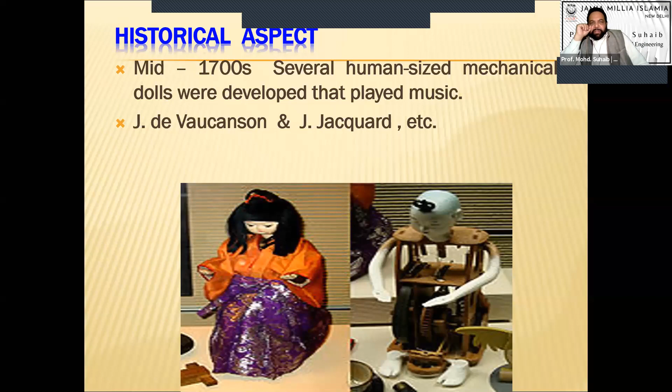Mechanical dolls were developed somewhere around the mid 1700s by scientists and engineers of that time. The intention was not originally for robots, but it automatically fell in line with robotics, under the category of what we call industry 2.0. These dolls were totally mechanical, and several other mechanical machines were developed at that time working purely on mechanical systems. Especially, the mechanical doll was developed for making different drawings.

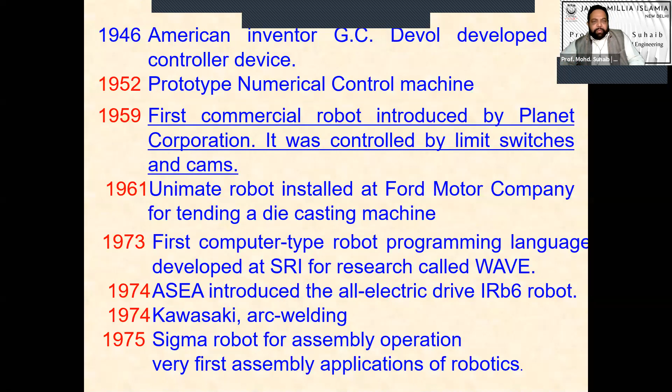In this race, somewhere in 1959, the first commercial robot was introduced by Planet Corporation. Thereafter, other players came into the market one by one - in 1961, 1973 Kawasaki came, then Sigma robots, Puma robots, and in the 80s IBM came into the market, followed by Honda and other players. But one major drawback with robotics is that these players who came into the robot market keep their monopoly, and this monopoly is such that even today they hold full-fledged monopoly.

There are very few players developing robots for a particular type of job, and for that robot they hold their own monopoly - no one else can enter their technology. If something goes wrong, you have to depend on them. It's not like a computer, where if something goes wrong you need not depend on one source - you can go to any person and they'll do the needful. But in robotics, and to some extent in CNC machines too, this monopoly is held such that whatever technology they have, they don't give the codes to others, and those players stand alone with their product in the market.

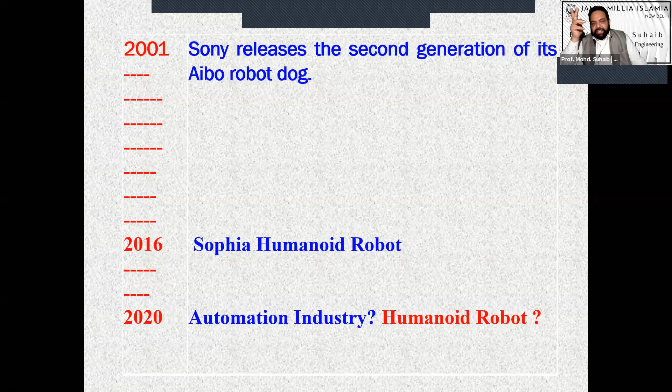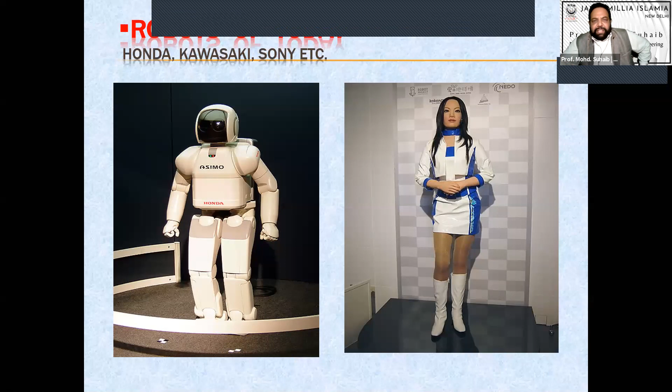These robots are available already - the Asimo robot was there in the Ashoka Hotel, you'll be knowing this. Sara is a theater dancer of Korea, used in a theater as a dancer. And in the race of robotics, the latest technology or ultimate thing that robotic engineers have developed is Sophia.

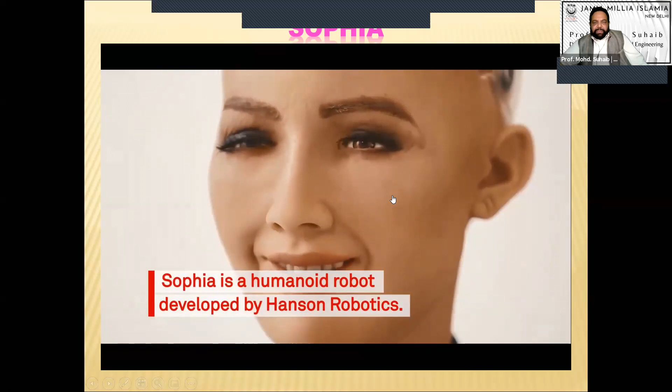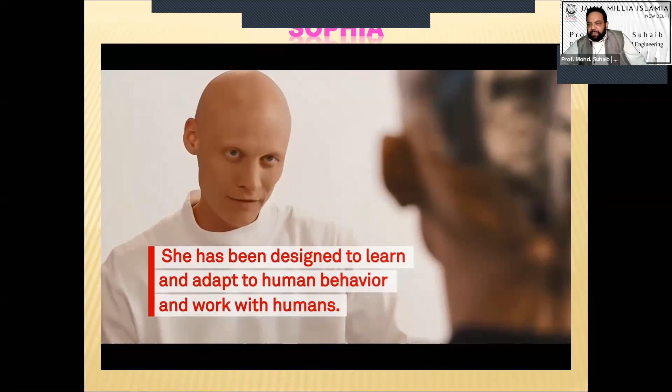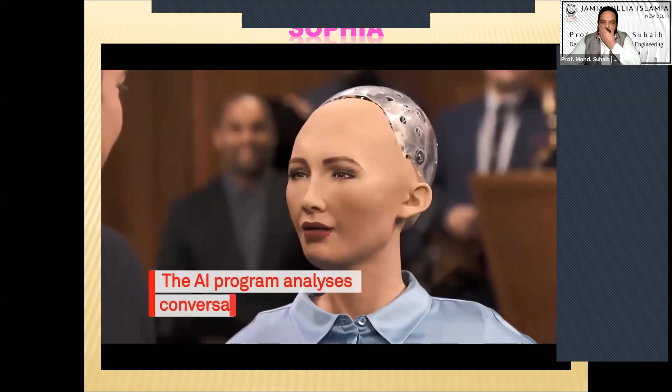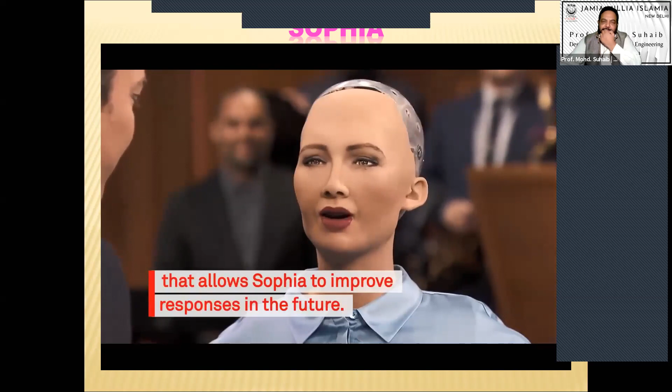In our country too, different players have developed different types of robots. Regarding Sophia, as far as Sophia is concerned, this is the ultimate technology developed in the field of robotics. You'll be knowing that Sophia has also visited India - she came to IIT Bombay and IIM Ahmedabad. You can see all these videos available on the net.

Now coming to something more specific to our area, engineers. I assume most of you here are engineers. Engineers are people who design, construct, and maintain structures, materials, and systems while considering the limitations imposed by practicality, regulations, safety, and cost. One important consideration whenever you are developing or designing any system is cost - it's one of the very important criteria for engineers. Any product, if it is not economically justifiable, there is no use - you can't launch it in the market.

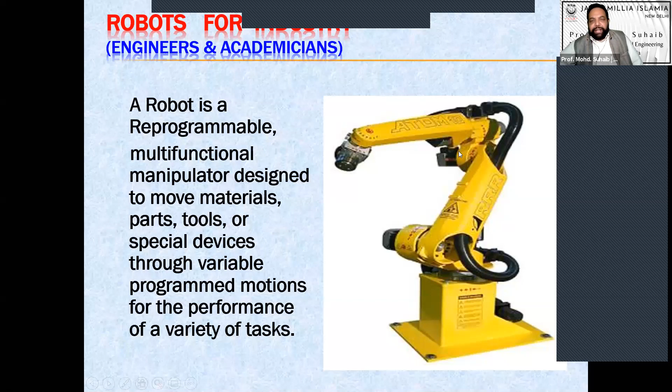So similarly, in case of the robot also, why not have only the hand? So engineers talk about the robotic hand only, and we call this an industrial robot. So an industrial robot is a robot manipulator or robotic hand. Yes, of course, in this robot, one thing will be a mechanical arm, the other will be a controller, which is the brain. Brain is required. Sensors will be there. Some communication system will be there. And at the end, the grippers will be there, and power supply. These are the elements of the industrial robot.

Rather than having a full-fledged humanoid robot, this system, which is the cost-effective system, is generally used in the industries, and we call them industrial robots.

Most of the time, it happens that people from sociology or social sciences backgrounds come into the robotics lab and ask us where the robot is, and they stand adjacent to the robot, because they have a concept that a robot will have a head, two legs, and two hands. But industrial robots are robotic manipulators. They are the robotic hand having these elements. And this is one of the ways we use these types of robots in industries, especially in the manufacturing sector.

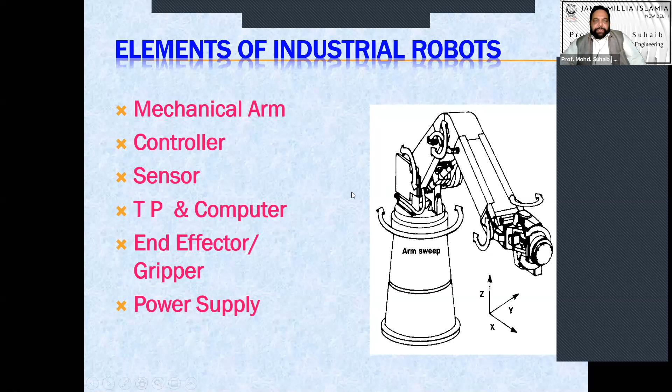So when we talk about industrial robots, there are two major parts: the body arm and the wrist assembly. In your hand also, you see the two major things. One is the body arm and the other is the wrist assembly. Similarly, in the industrial robot, they have their own importance. The body arm has its own importance and the wrist assembly has its own importance.

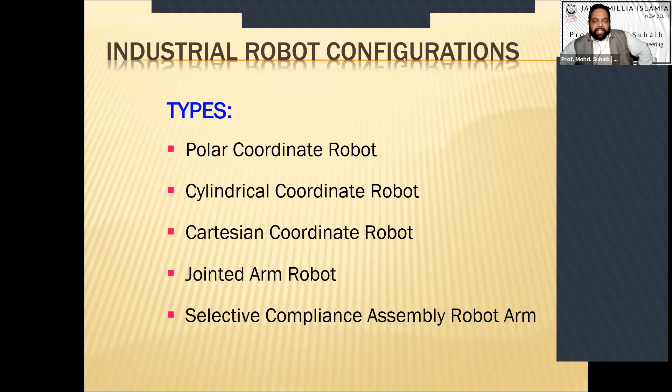The common body arm configurations, you must be knowing, you would have seen in the books: polar coordinate configuration, cylindrical coordinate configuration, Cartesian coordinate, jointed arm, and SCARA configurations. These are the standard robot configurations for the body arm.

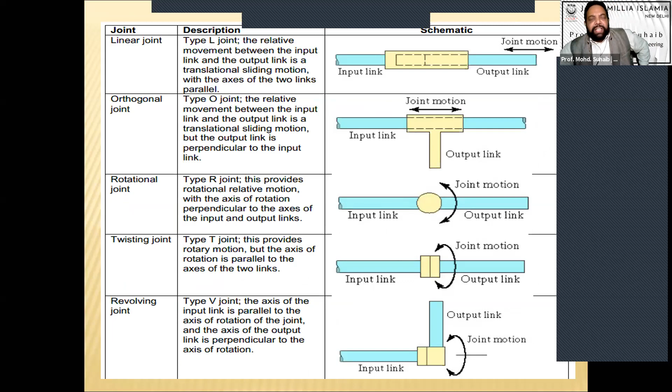And we achieve these configurations with special joints. These joints play a very important role in achieving these configurations. We don't have the time to discuss these joints, but they are a very important thing in the area of robotics for designing configurations. On the basis of the joints, we denote the different robots. Rotation, for example, polar coordinate, generally we say TRL.

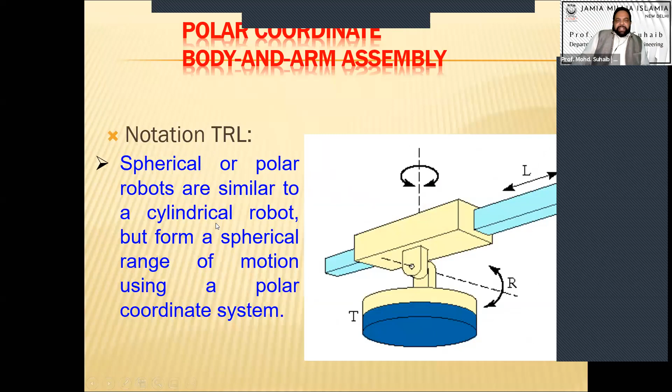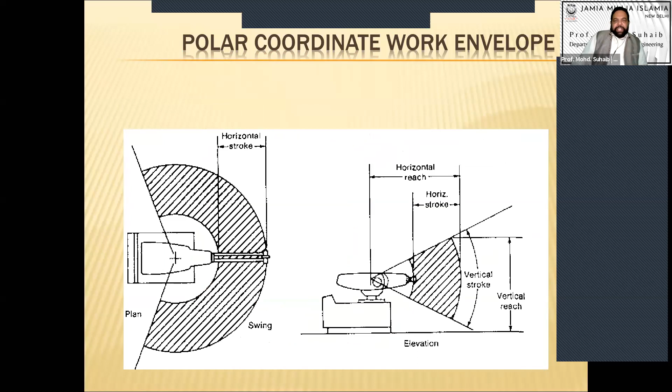And the work envelope, the zone in which the robot can work, is known as the work envelope. For the polar coordinate, we get a sphere. And the two important things, the reach and stroke, are related to what extent these arms can work in a horizontal direction or in a vertical direction. Accordingly, the horizontal reach and vertical reach are there.

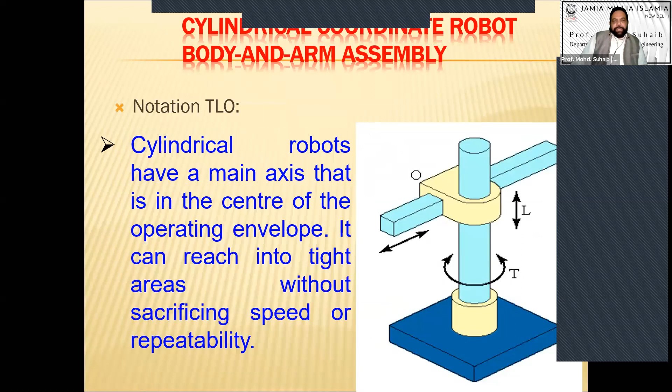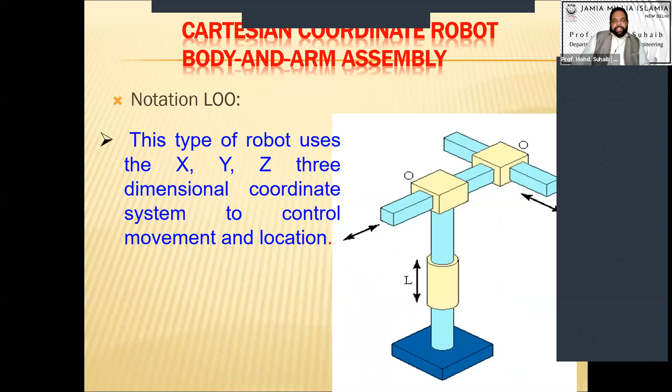Similarly, for the cylindrical coordinate robots, we get a cylinder as the work envelope. Cartesian coordinate robots, of course, all the joints have the Cartesian motion, where you will be getting a cuboid as a work envelope.

The most common and versatile type of robot is the jointed arm, also known as the articulated arm, where all the joints are rotary joints. Of course, the base is twisting. So here the work envelope is the semi-sphere.

Then the last is the special purpose robot known as the selective compliance assembly robot, which is the combination of, you can say, the cylindrical arm and articulated arm, and even today it is used in different assembly lines.

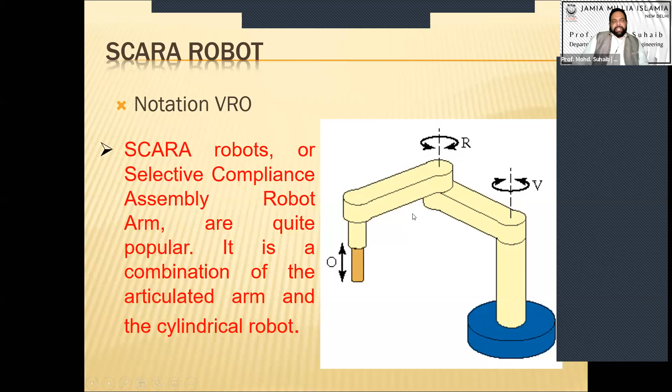Now coming to the wrist configuration. At the wrist, as you see your wrist, one of the very first features is the gyroscopic motion: roll, pitch, yaw. This motion is pitching, this motion is yaw, and this is roll. So at the wrist end, we have 3 joints.

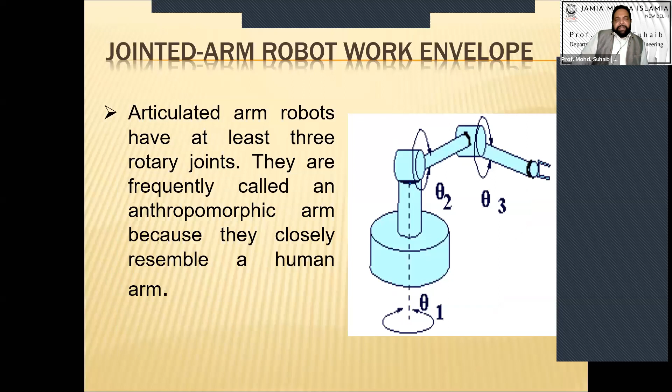So one thing to be kept in mind is that generally we have 3 degrees of freedom in the body arm, and 3 degrees of freedom at the wrist end, in the wrist configuration. We are not talking about the fingers. So generally there are 6 degrees of freedom for a robot: 3 for the wrist and 3 for the body arm. However, further degrees of freedom depend on which type of end effector you are going to use.

At the end point, you can mount some tool, or you can mount some gripper. In case of the tool, most of the time there is no degree of freedom, so the total degrees of freedom of the robot will be 6. And if it is a gripper, then the degrees of freedom will vary.

And here you see that again cost is the issue. So in industries, depending upon the application, we decide whether we are going to use the tool or the gripper. If we can work with the tool, we are not going for the gripper. But there are situations where a tool will not work, and we will have to go for grippers.

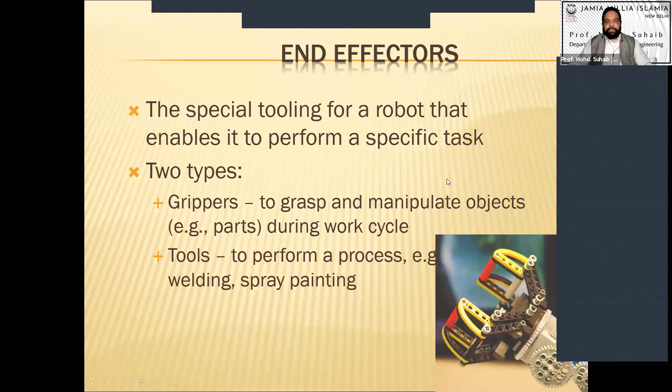Now coming to the specifications of the robot, as per the definition we gave of robots: a robot is a reprogrammable multifunction manipulator designed to move material, parts, tools, or special devices through variable programmed motions for the performance of a variety of tasks.

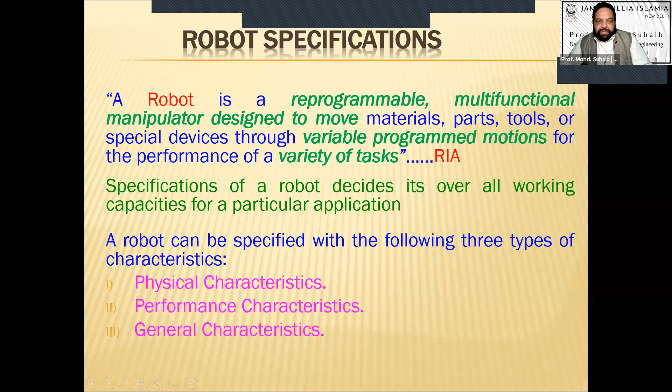So on the basis of this definition, there are three types of specifications required for robots: the physical characteristics, the performance characteristics, and the general characteristics. These characteristics are important whenever you are going to purchase or design a robot for any particular type of application.

If you talk about the physical characteristics: the robot configuration we discussed, the number of axes, that is the degrees of freedom of the robot, type of axis movement, the floor space required, then the physical details, weight and physical dimensions, type of power service requirement, which type of programming there is, control system, sensors, memory. All these come under the heading of physical characteristics.

Then if you talk about the performance characteristics: accuracy, repeatability, resolution, velocity range, operating cycle time, load carrying capacity, life expectancy, reliability, maintainability, mean time between failures, mean time to repair, availability. All these are the specifications related to the performance of any particular robot.

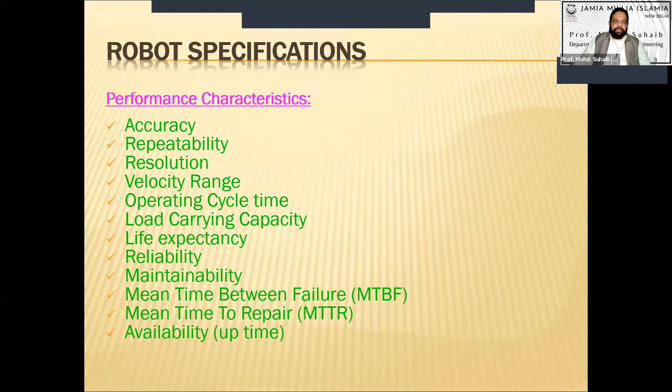Then these are some general and common characteristics: movement capability, input-output capabilities, special features and end effector capabilities, work volume or envelope reach. So it's important that whenever you are going to use, design, develop, or propose a robot, you must have an idea of the specifications, exactly what is required, and which particular specification you need up to which level. Accordingly, the cost of the robot will vary.

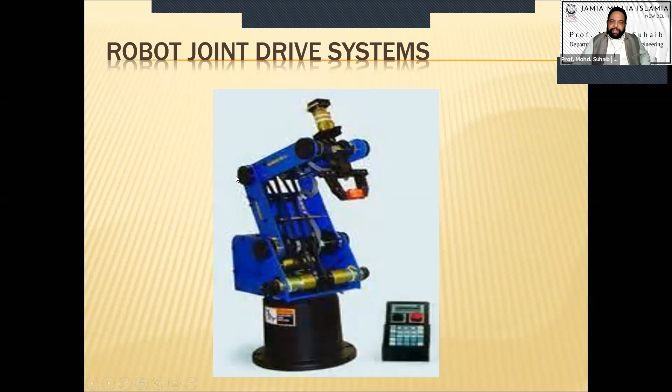You see a standard educational robot, ER4U. Ultimately, when we have been discussing the industrial robot, it is just some structure where one end is fixed and the other end is free. The links are jointed or connected with each other by some type of mechanism. And if you remember, this is nothing but the open kinematic chain we studied in theory of machines.

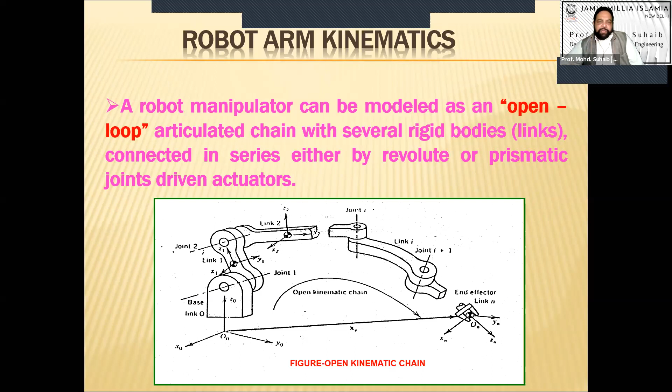In theory of machines or kinematics of machines, if you remember, there are kinematic chains, open kinematic chains. So an industrial manipulator, an industrial arm, is nothing but an open kinematic chain where one end is fixed and the other end is free. So from the kinematic point of view, it is very important to know the inverse and forward kinematics of the robot. For that, we do different types of analysis. We will not go into full detail on forward and inverse kinematics; a lot of mathematical treatment is there.

However, we treat it as an open kinematic chain. One end is fixed, the other end is free, and we put different coordinate frames on the different links, and the coordinates at the last link we transform with reference to the base coordinate. So we can get the position and orientation of the last link, which is our primary interest. In the case of the industrial robot or robotic manipulator, we always try to analyze the position and orientation of the last link, because in industry this is ultimately the end effector or gripper which is going to pick an object, place it somewhere, or take it from somewhere.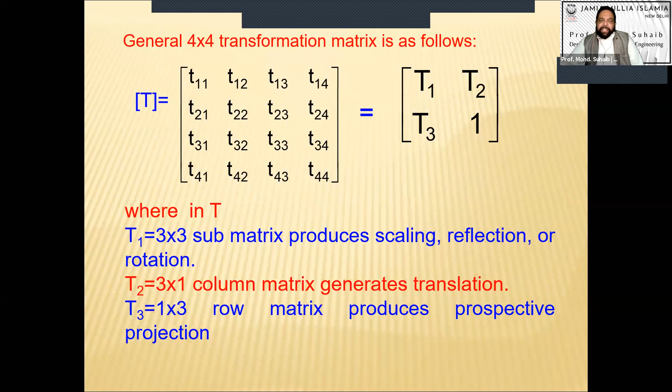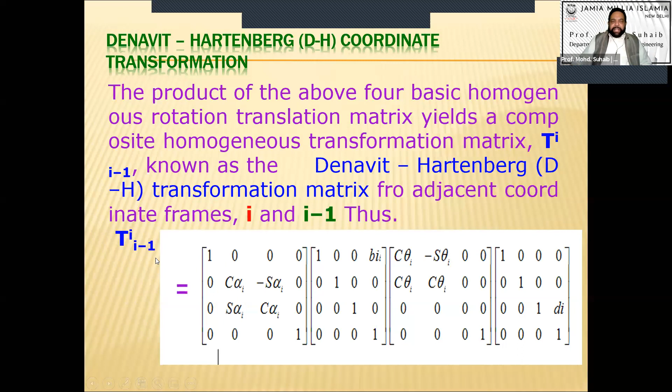So position and orientation of the last link is our primary interest. In the case of kinematics, the standard homogeneous transformation is used for this job, and you must be knowing this standard transformation matrix. With the help of this matrix, Denavit-Hartenberg is a standard procedure given by mathematicians, and with this we develop a matrix T from i minus 1 to i, which is used for transforming the coordinates between link i minus 1 and i.

For example, if i is equal to 1, it will be from 0 to 1, or similarly 1 to 2, 2 to 3, 3 to 4, up to n number of links, whatever links are available. And this is the standard matrix which is used for forward and inverse kinematics.

These are the link parameters: ai, link length; alpha, the link twist; di, the link offset; and theta, the joint angle. So we analyze these 4 parameters and apply this DH matrix, and we can go for the forward or inverse kinematics.

As standard practice, for given joint angles and link parameters, determination of the position and orientation is known as the forward kinematics. And opposite to this, for a given position and orientation and link parameters, determination of the joint angles is known as the inverse kinematics.

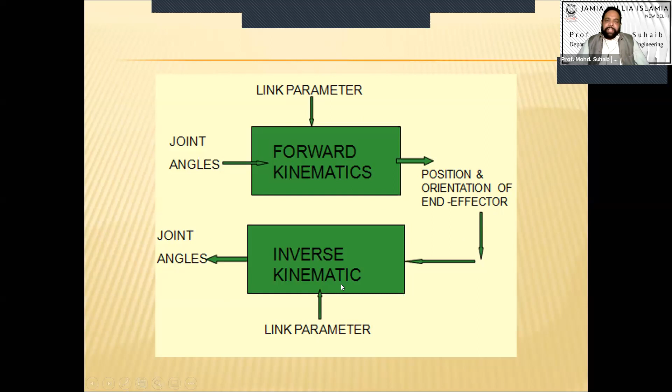So inverse kinematics is more important compared to forward kinematics. Whenever we use robots in industry, we have to program them, and for programming we need the joint angles, which we determine with inverse kinematics. So as a concept, where is my hand? The answer is given by direct kinematics. And how to send the hand there? That answer is given by inverse kinematics.

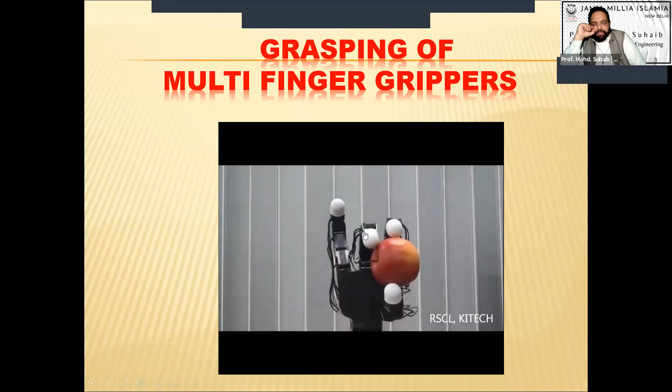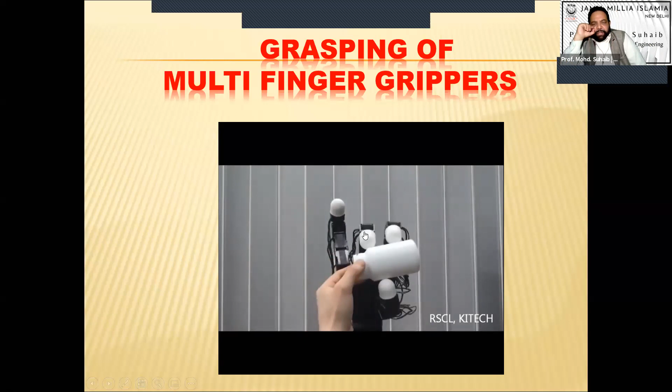So now coming to something more specific, focusing on grippers. See here, in a multi-finger gripper, the grasping process. Sometimes the question arises: how many fingers are required for holding the object so that it is in equilibrium, in dynamic equilibrium?

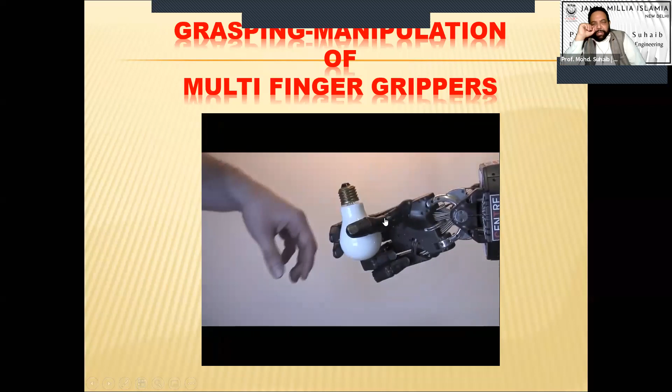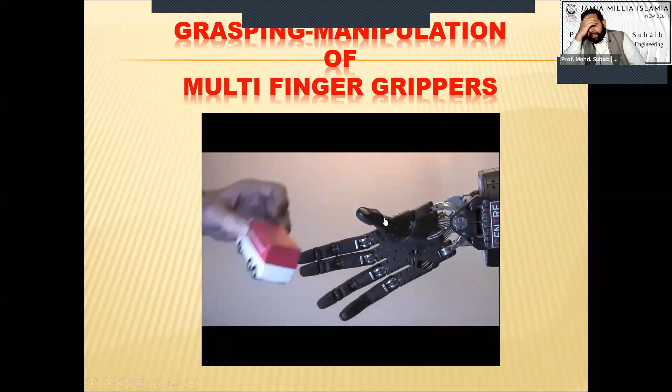Most of the time, as far as tools are concerned, tools are a single finger with 0 degrees of freedom. With 2 fingers, as you would have seen in the last video, parallel jaw 2-finger robotic grippers are very common. But when the object shape is not regular, we have to depend on multi-finger grippers.

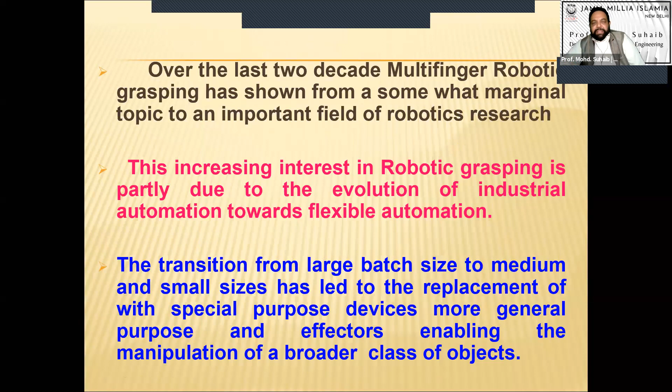Over the last 2-3 decades, multi-finger grasping has grown from a marginal topic to an important field of robotic research. This increasing interest in robotic grasping is partly due to the evolution of industrial automation towards flexible automation. The end effector becomes more flexible, control becomes more complex, and better understanding of grasping turns out to be one of the challenging issues: how to hold the object in a proper way.

Body and arm are okay, wrist is okay, tools are okay, grippers are okay, but we need a gripper which can hold objects with proper holding characteristics: dexterity, equilibrium, stability. Developing this type of finger is one of the challenging issues for researchers. If you refer to the literature, you will find people have been working on it for years, and even today proper grippers have not been developed. That's why the degrees of freedom are 16 and 17.

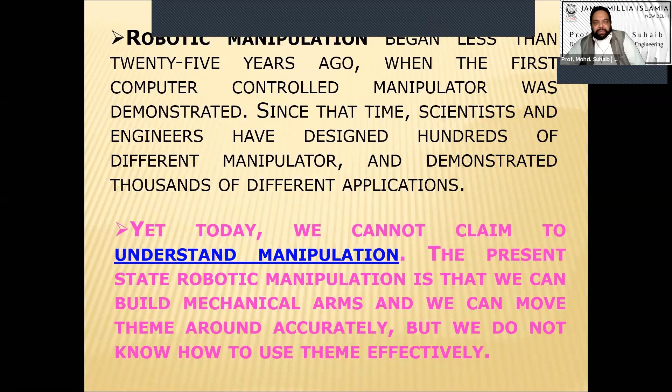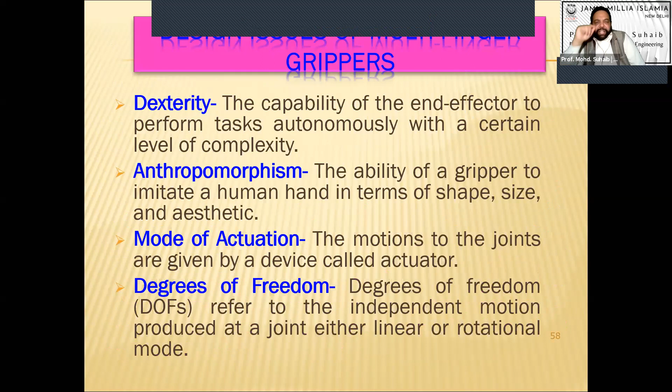The design issues which are related to the multi-finger grippers are dexterity, anthropomorphism, mode of actuation, and degree of freedom. These are some common issues which we have to achieve in a versatile gripper. A lot of people have been working in this area, and if you refer to the literature, you will find several hands have been developed. But issues are there with reference to these parameters: dexterity, anthropomorphism, mode of actuation, degree of freedom.

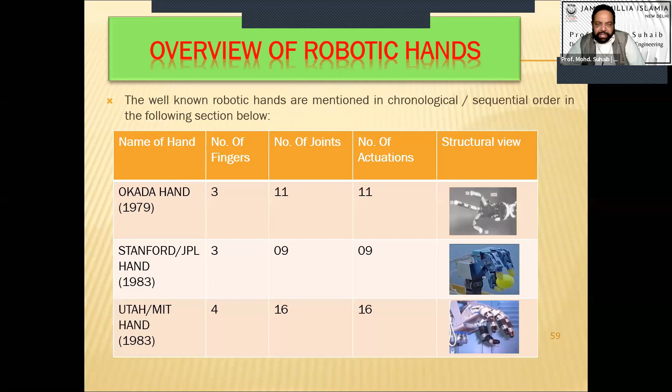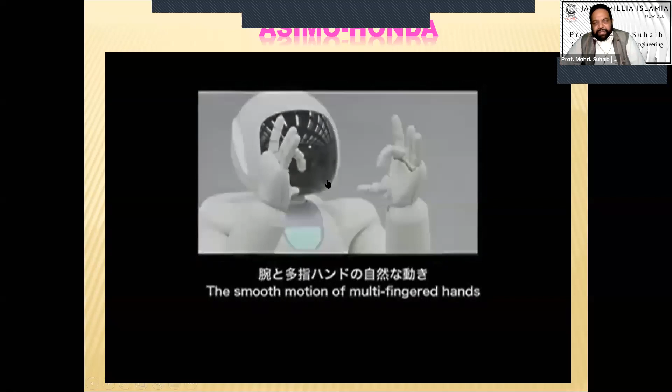Either you take the Okada hand or the Stanford or MIT hand, in all these hands you can see the number of actuations and degrees of freedom are varying. And they are not able to reach up to the human hand. Whatever hands have been developed, they are being used in robots within their existing capabilities. This hand is looking like the human hand, of course, but it doesn't have all the capabilities of the human hand. The degrees of freedom are not there.

So, even in this area, developing a hand which can replace the human hand is one of the challenging issues. And I am also working in this area. I will be showing some of my work in the next slides. Before going to that, I would like to discuss

I think the slide is not working.

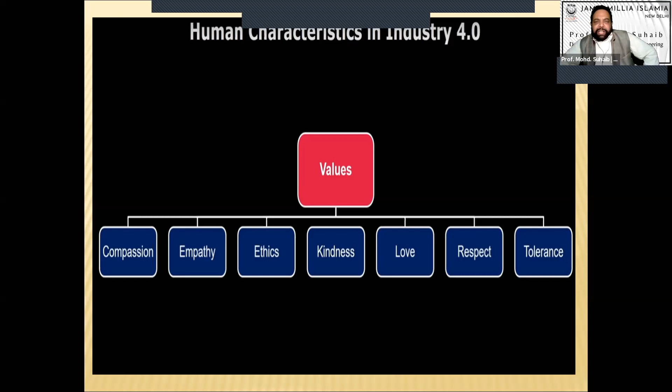If you talk about humans, they used to do these things. But what about the machines which are coming, whether they will give these values or not? It is one very big challenge, because scientists or engineers have to think about it, yet they are busy with the technology. This interaction of Humanity 4.0 with Industry 4.0 raises common issues: job creation versus job destruction, the definition of education per person, the definition of the human being. Either these have to be changed or we have to stop it somewhere.

So this is one area where things are going to diverge very soon. I will not continue further in this area because this is not the topic here. However, this is a very interesting area and it needs a lot of discussion.

As I told you, I have done some work on multi-finger hands, and we developed this hand, which we named the Jamia hand. This hand is designed in the Robotics and Automation Laboratory, Department of Mechanical Engineering, Jamia Millia Islamia. It consists of 3 fingers and a thumb, designed to imitate the anatomy of the human hand. 3 fingers and 1 thumb, so a total of 4 fingers, not 5. As I told you, the number of fingers in the human hand is 5.

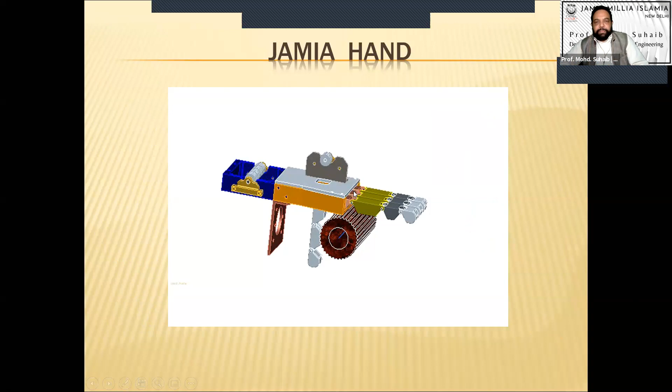Each finger and the thumb has one actuator for joint movement, as in the finger hand. You can see here, in between the joints are there, and here in the hand we have the motion. At least on one joint you need one actuator, and for that you need the control. This gripper which we propose here in our laboratory is a tendon-driven one, so one tendon passes from the very first joint through all of them, and ultimately it goes back. You see here, this type of actuation is there.

This mechanical hand used as an end effector robotic arm is primarily composed of 4 components, namely joints and links, actuation system, transmission system, and sensors. As far as degrees of freedom are concerned, on one finger we have 3 degrees of freedom, however in the thumb we have 2 degrees of freedom. So total degrees of freedom will be 11 for this hand.

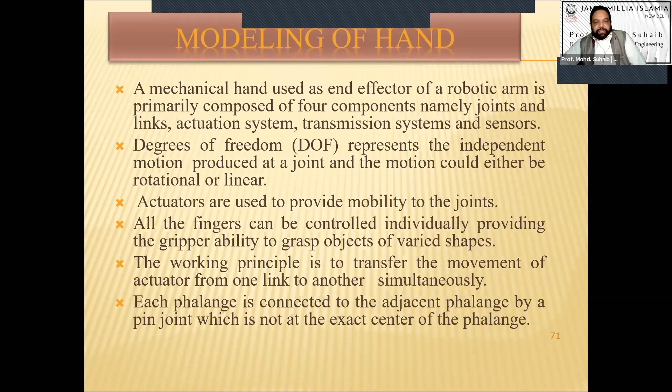You can see here the links and the phalanges, and how the tendon is passing. On these joints, where phalange 1 is connected with phalange 2, and phalange 2 is connected with phalange 3, we have a pulley system, and at the same time torsional springs are also there. So inward motion we will be achieving with the help of applying force, and outward motion will be automatic with the help of the springs.

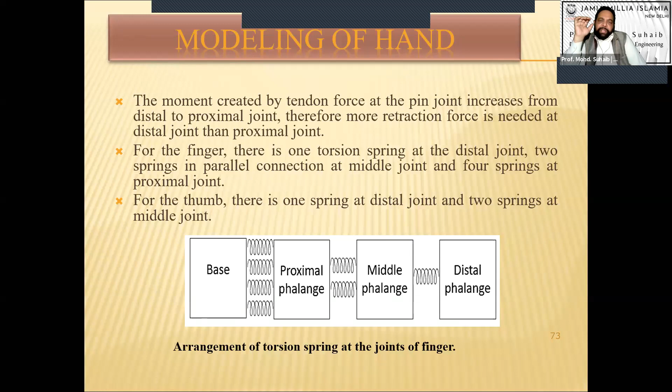These springs, at the distal-most joint we have 1 spring, then at the middle and proximal phalange we have 2 springs, and at the proximal phalange and base we have 4 springs. These torsional springs work for reverting the hand to its original position, however for inward motion we will be using the tendon force. This is the isometric view where you can visualize holding different objects.

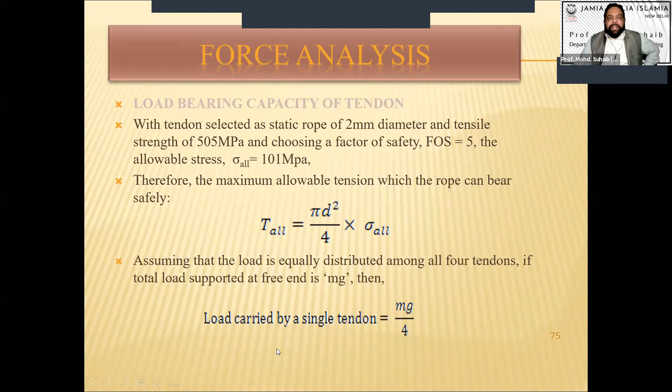Regarding its force, and some studies, we have a shortage of time. Force analysis using standard design equations, you can go for its force analysis.

We have done this force analysis using the standard T1 upon T2 equals e to the mu theta, because a belt pulley system will be considered here, starting from 1 to 2, 2 to 3, 3 to 4, 4 to 5, 5 to 6, 6 to 7, and 7 to 8 last. In this way you can calculate the tensions, and this is further verified both numerically and experimentally.

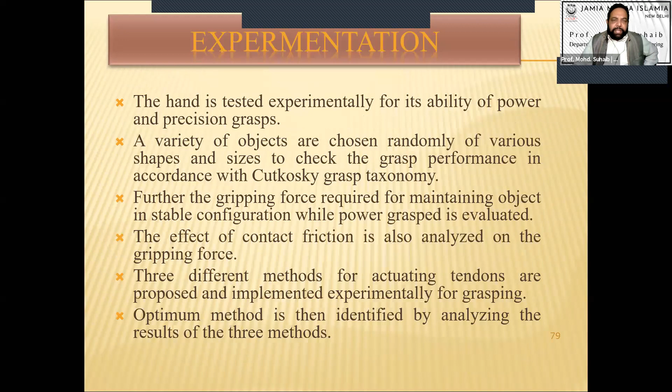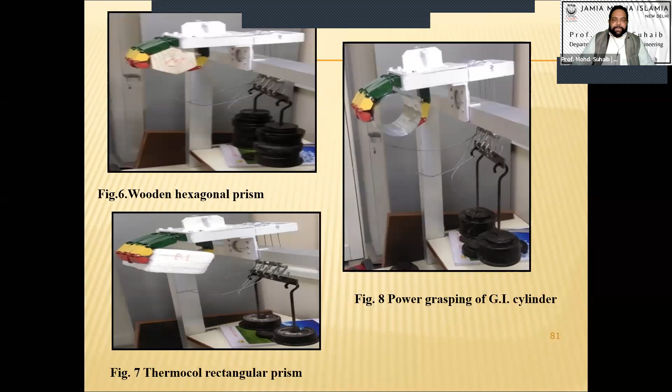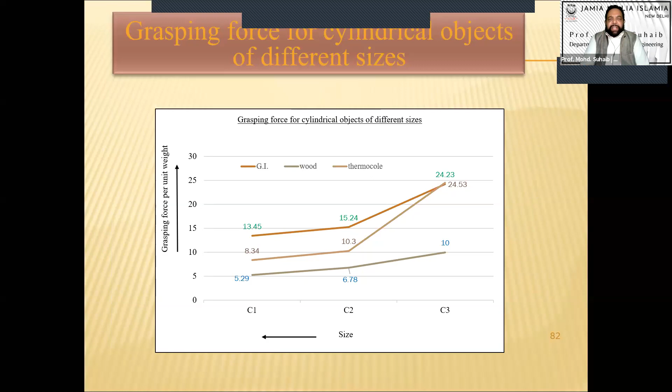So we took different types of objects: hexagonal, cylindrical, and rectangular prism objects made of wood, GI sheets, and thermocol. We performed the experiment here, and you see these results are very much what we got, the numerical and experimental results were validated for this simple study.

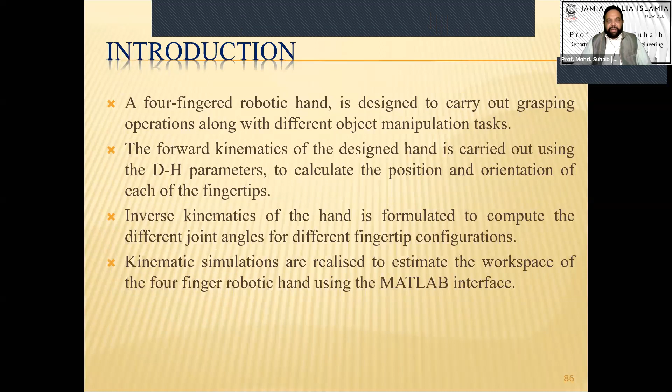Then we also did the kinematic analysis, and here it's a modeling, and finally simulation was run in MATLAB. So as far as the analysis aspect, you see here that for the ring finger, middle finger, and index finger we have the same type of kinematics, three joints are there, however for the thumb we have slightly different kinematics.

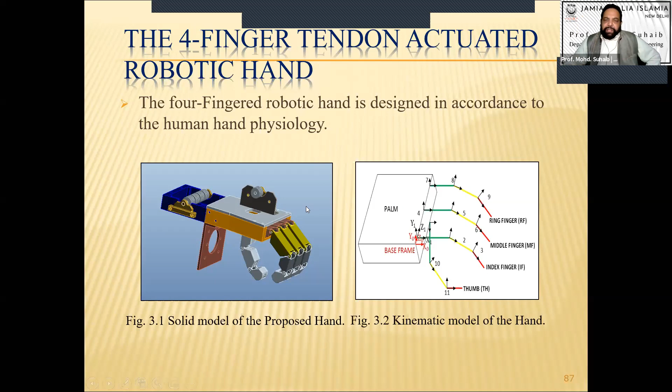That is 2 joints only, so you can take the analysis for 1 finger and the thumb, that will be sufficient, the same analysis will apply for all 3 fingers. This is the mechanism we discussed before, so here it is shown the kinematic model of the finger, and here the kinematic model of the thumb.

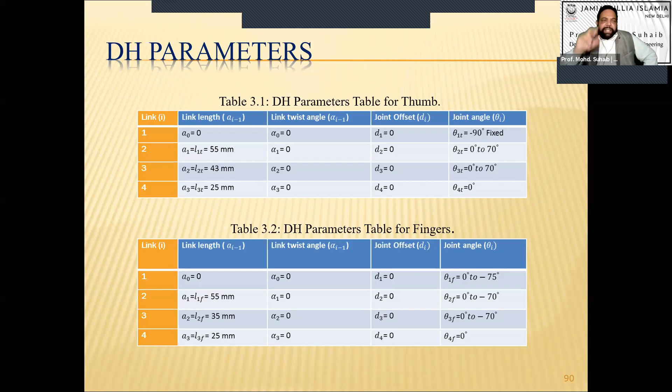As we discussed the DH parameters in inverse kinematics and forward kinematics, you can write the DH parameters for the thumb and for the fingers. These parameters are taken manually with measurements, and we applied the standard 4x4 DH matrix between link i and i-minus-1 to solve it.

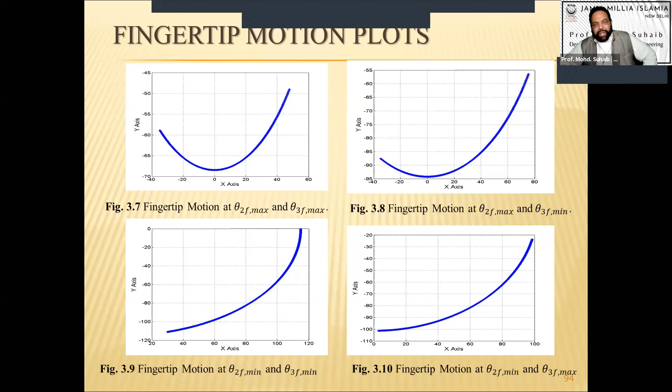And if you run the plot, you will find that the plots for the finger and the plots for the thumb are both in coordination as per the physical visualization. Whatever kinematical equations we are getting, this result is going to get validated.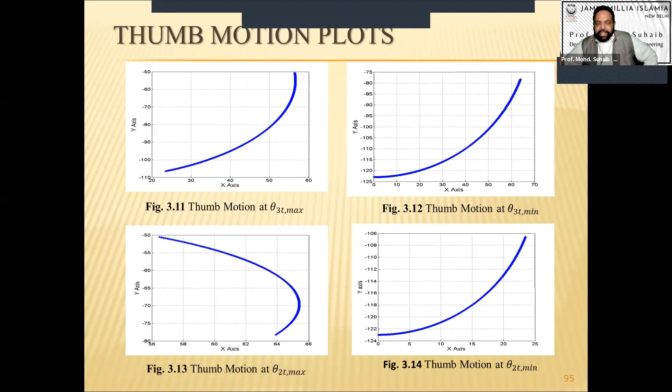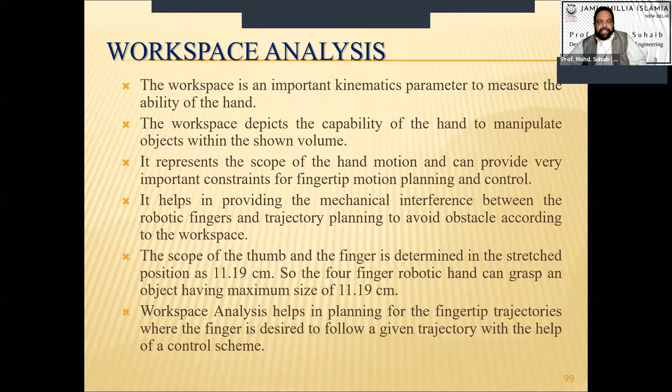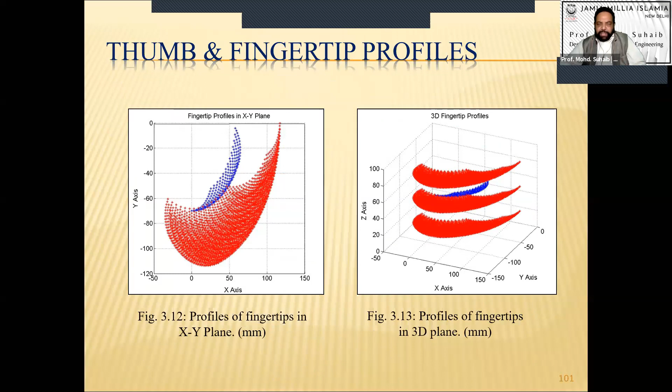Further, the inverse kinematics, with the help of geometrical parameters, different joint angles for the fingers and thumb can be determined, and it has been shown here. Workspace analysis has also been done for the fingers as well as for the thumb.

So these are the different studies we are doing on this hand. Design and development was the first phase, then kinematic studies and different types of simulation was the second phase, and the third phase, dynamic modeling and control, is in progress.

Fortunately, we got some grant from the ICT also for extending this work and realizing the model. I hope that in the next two years we will put it in the market in one form. We have also collaborated with AIIMS in this regard, so that if anyhow we can reduce its weight, they are ready to take this technology.

A lot of work is there which I have not included here. As far as applications of multi-finger robotic grippers are concerned, they are mostly used in manufacturing sectors, rehabilitation is also due, and humanoid robots and other human applications. The applications which are there today in the market are very limited.

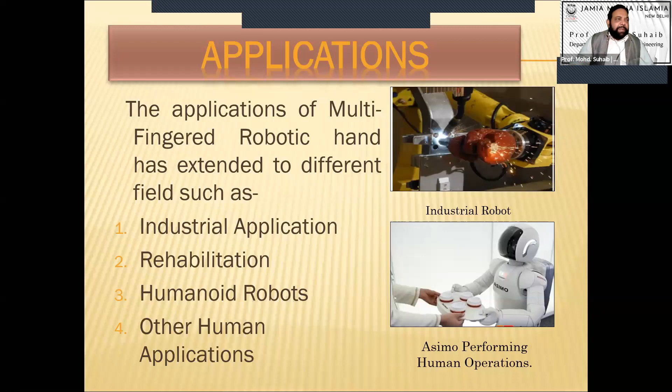So the research areas related to multi-finger grippers and robotics, where research can be extended, include arm modeling and simulation, arm kinematics, arm dynamics, arm trajectory, arm control, artificial intelligence, robotic vision, multi-finger dexterous grippers, and applications of multi-finger grippers especially for FMS and CIM areas.

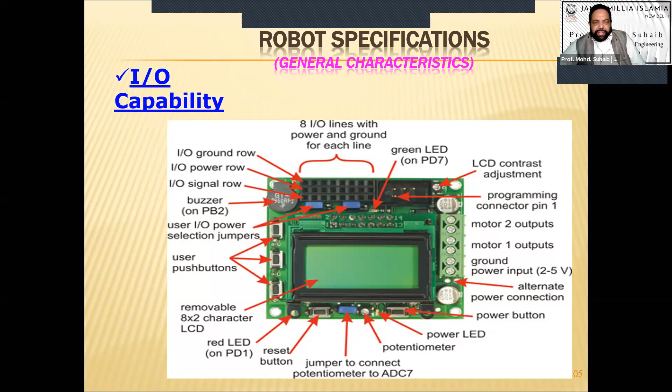You can see here these general capabilities, interfacing capabilities for all the controllers which are there in the robot. With the help of that, they can be used for different applications.

For example, robotic surgery, which is already being used. As such, if we implement robotic surgery, a doctor sitting at any other place - for example, one expert doctor is there but not available at that location - he can operate on the patient from the other place with help. In fact, the operation will be done by the doctor, but it will be a machine, with the help of robots.

Because of several reasons, there are multiple reasons why people are even not going for robotic surgery. Fear and hesitation is one of them. However, this technology has been fully tested and is being used.

Here high-end grippers are required, and if you would have seen surgeons during operations, how fast they articulate their hands - that feature is lacking a little bit in robotic grippers. So that's why multiple robots are used, rather than one robot having one type of gripper feature, another robot has another type of gripper feature.

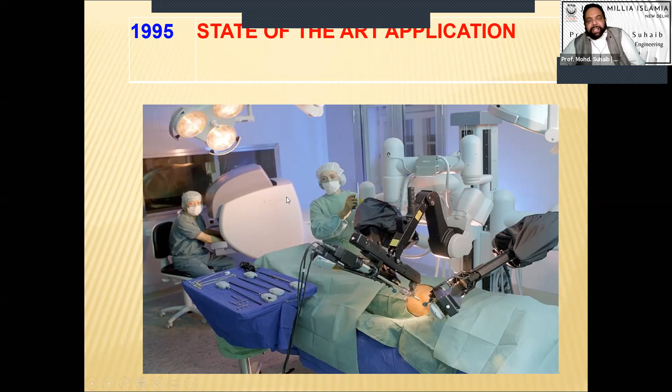So that's all about my talk. And a little bit before finishing, let me add something more.

I would like to introduce you to the Robotics Society of India. Especially academicians and industry people from the country thought that as such, in India there was no society for robotics. So a society has been developed, and this society's name is the Robotic Society, and the website is rsindia.org.

You can note it and see rsindia.org, the Robotic Society. On rsindia.org, you can see that our Professor Shantanu Chaudhury, who is presently the director of IIT Jodhpur, is the president of the society.

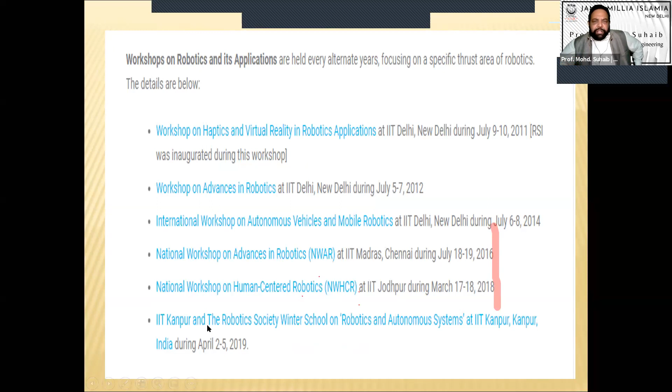Different workshops are also being organized by the society, and the next workshop will be organized, I think somewhere in the month of October or November, by IIT Ropar. You can refer to the IIT Ropar website; the society will be organizing the next workshop there.